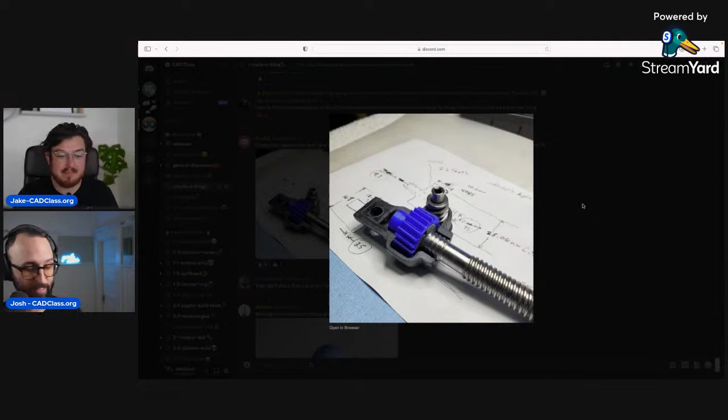Yeah, and I wonder, do you think he probably used the gear plugin? For those of you who don't know, later on in our program we design a gear early on, and then later we do actually use the gear plugin. So the point of the gear project, the involute gear, is both the math and the thinking behind it, and to get better at CAD and at sketching. It's not to make a gear. If you're going to make gears like this, you are going to want to use the gear plugin.

And we'll show you. It's that kind of roundabout way that educators work, where the purpose is not to make a gear, it's to learn about organizing a sketch and thinking a little bit more two-dimensionally for your projects.

Yeah, and eventually as you get better in the workflow, you can also pull things in from McMaster-Carr, which is a catalog of online parts. That's highlighted in a later project. As you progress through the program, you're designing fewer things, and you're starting to think about how you can bring designs together into something functional that serves its purpose. You're not going to be designing every screw, every gear, every motor. You're going to borrow from the library of stuff.

And by the way, I feel like we should mention AI here. I've seen some AI plugins recently. Probably what you'll be able to do in the near future is have typed information that leads you to the catalog, to the CAD model that you can just find. So if you type in M20 bolt, or whatever, I'm making stuff up, it'll just bring in the most common bog-standard bolt, which is all most people need.

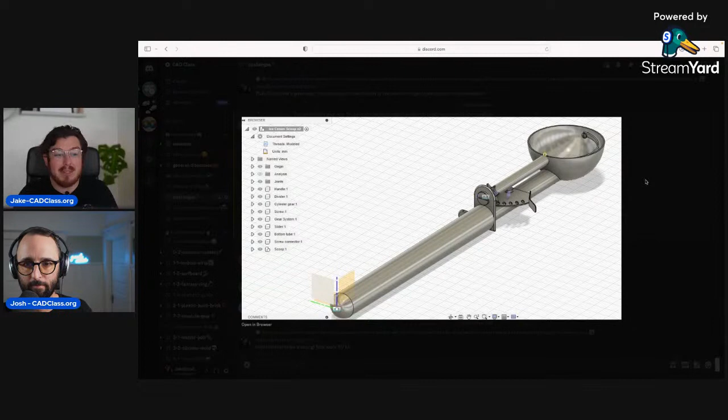I believe this is the first person that's done it, which is awesome. I love this, look at that. It's pretty complex, not easy. It looks like he was working on it for a little while.

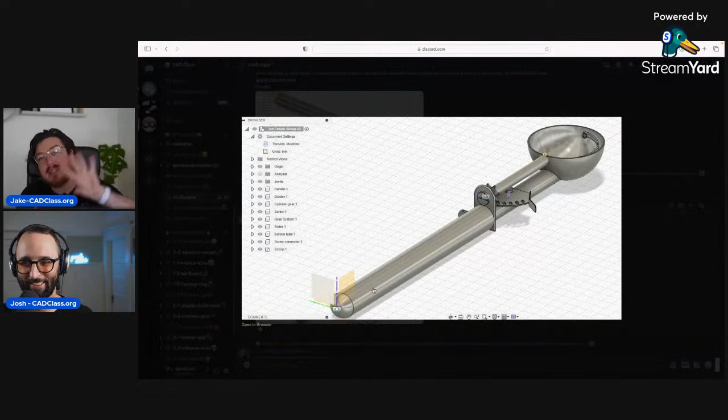I think he started off with the most difficult mechanism, the most difficult bit at the bottom. Good. And then he was like, hey, how do I make the scoopy bit? So we were talking about getting two different spheres to cut out each other, or maybe do some revolve cutting and revolve joining to get a little bit more control with it. But it looks like he did a fantastic job of this.

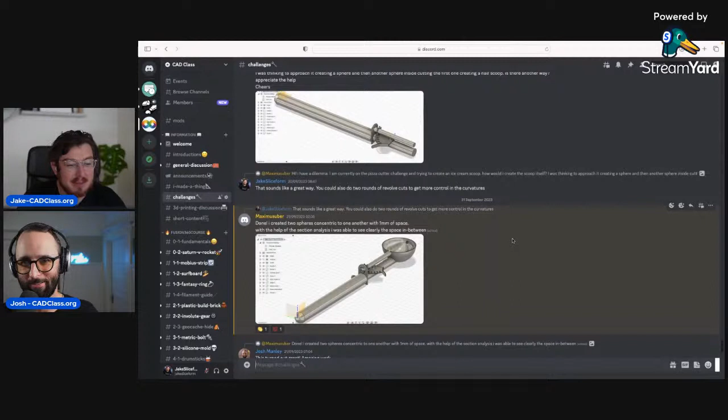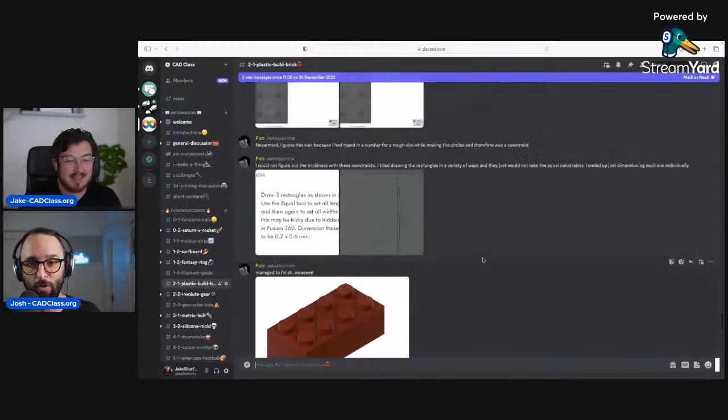Next up is Lego, go to the Lego page and check this out. We had a lot of people make the Lego, right? Shout out to everybody who did it. But then we had somebody actually print it and show us. Scroll up right there, check that.

We did get some comments, so it sounds like a couple people have tried to print these and the tolerances are not perfect. Just FYI, we did not design these necessarily to be 3D printed, so you will definitely have to play with tolerances. We are not pretending like these tolerances are great, especially considering how tight some of these tolerances are for these Legos to stick together but not stick together too hard. This is one of those processes where, I don't know how you feel about this Jake, but 3D printing is really not ideal.

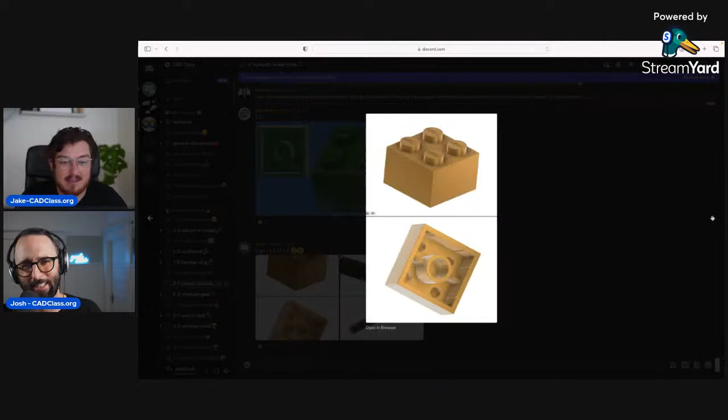It really comes down to there being way too many variables that go into it. Plastic injection molding is such a great technology because it can hold its tolerances so well. You've got two big blocks of metal pushed together, inject some molten plastic, it cools down very quickly, the shells come apart, and it pushes that plastic part away.

And with that, you get a degree of the plastic being so hot, and then as it cooled down, it shrinks a little bit. Because we've been doing this for like 100 years, we can calculate it shrinks exactly 2 to 3%, so we can kind of work backwards. The real consistency that you can get with plastic injection molding is just so high.

The efficiency and the tolerance are so fantastic that it's really the goal for 3D printers to reach up to. The downside with 3D printers is that it can get pretty tight tolerances for your printer, your material, your setup. But if you give the exact same file to someone on the other side of the world who may be printing with the same material on the same printer with the same settings, their environment is different.

So the plastic is going to flow a little bit different. It may be slightly humid, so some of the material puffs out a little bit, or there's moisture inside the filament. There are so many little tiny variables that come into it that it's borderline impossible to have a verifiable, perfect amount of accuracy and tolerance between any 3D printers in the world.

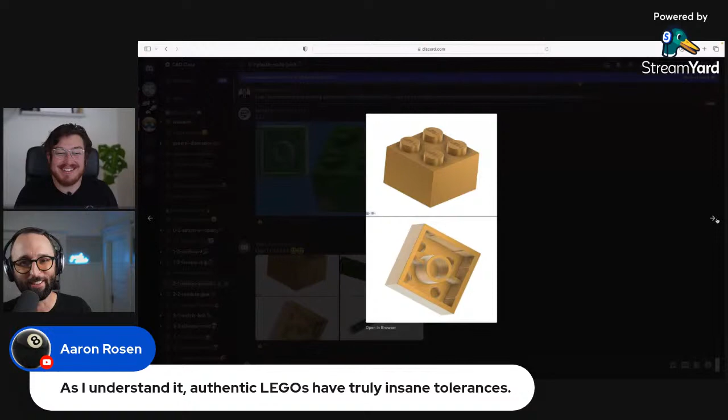A lot of this stuff too deals with, like when you're talking plastic tolerances, when you're talking filaments and things like that, you start to have to become a plastics engineer. You have to think like a plastics engineer to get stuff to work well. So I just love thinking about and talking about Lego - obviously one of my favorite childhood toys too, as I'm sure a lot of people here. Yeah, it is. There are so many little bits and pieces in the design of this that are just so genius.

One of the things I don't think a lot of people know about is when you have plastic injection molding, you've got two parts, two halves of a shell that push together. There is always something called a parting line where the two metal parts meet together. It'll leave this little tiny proud line all the way around the plastic part. I don't know if I have anything right on hand that shows that perfectly. Do I? No, these aren't injection molded. Anyway.

If you look at most plastic parts, you'll see a little line that goes all the way around it, and that's just where it has to go. It's sometimes called a flash line as well. Very, very cleverly, because Lego wants to have really perfectly smooth sides all the way around, it actually puts this parting line on the bottom edge. So if you take a Lego and flip it upside down, you'll see this bottom face isn't actually perfectly flat - there's a little bit of a lip to it.

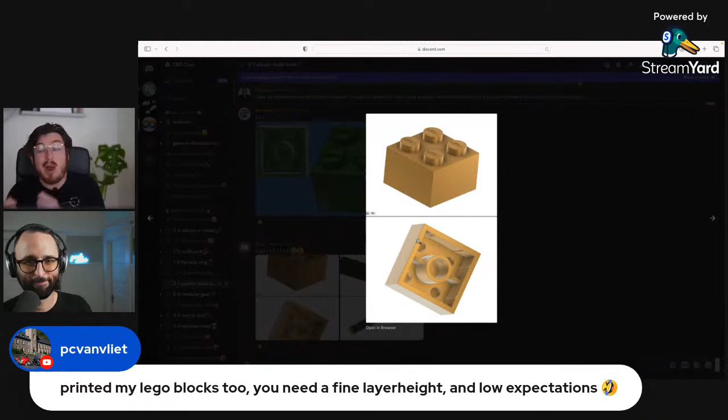So they're finding all these really creative places to hide all of the really necessary plastic injection geometries, but still let it work with the tolerance of the toy, which is just fantastic. Yeah, it's amazing. It's amazing.

All right, I've got a note here about Geocache, and I don't remember what about. So let's go into the Geocache section. And I think there was a question in there, right in there. That's the one, that right there.

So this is someone saying, hey, when we have the sketch for the very top section and this bottom horizontal line right at the bottom, we actually leave that undefined. And they were just saying, why is it undefined? Usually that's when we would project something and add a constraint to make sure everything is groovy.

You absolutely can do that. This was purely just an example to say that you don't need to make sure that every single sketch is fully defined. Most of the time, it's really good practice to make sure that everything is defined and looking good. But sometimes, in some scenarios, it's actually completely unnecessary. It's usually a ton more work to make sure that every single sketch is fully defined, and in this scenario it's just not necessary. You just make sure that a line is below a certain section, and then you move on. So you can fix it if you'd like, but it's not necessary.

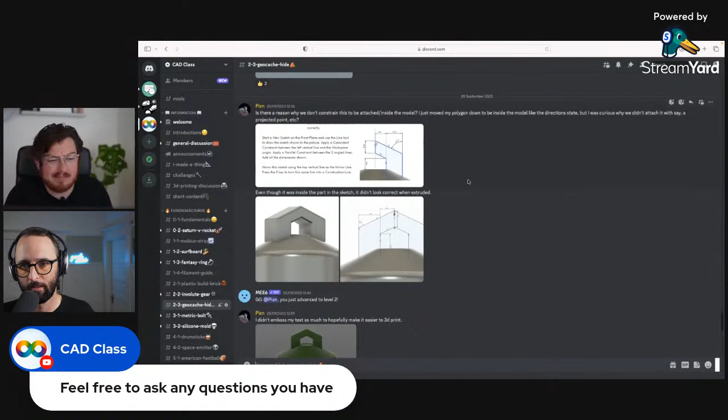I think that's one of those things that as you do more and more of this, and as you practice more, you're going to run into the kinds of problems that you only see when it's not fully defined. Other times you're not going to be able to fully define a sketch, and you're going to have to make a judgment call, and that just comes with practice. So yeah, absolutely. But good question.

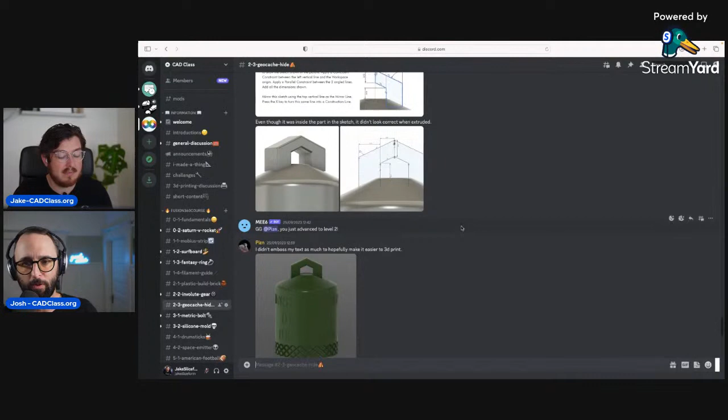I don't think there were any other big ones in there. Geocache, by the way, that's one of those amazing projects where if you print it on your 3D printer it actually screws together. So we forgot to shout this project out.

Oh, the mushroom! Yes, this was fantastic. So in the challenge for this project, it's try and make a screw container that's kind of unique that you could reasonably hide in the world and people not notice. This person made this really, really killer mushroom, which has the container inside.

I love this one, I want to see it. I want to see them prime it and paint it like a mushroom. Yeah, and actually put it out somewhere in nature with a photo. So who was that? Shout out to what was the name on that one?

Johnny 3D. So Johnny 3D, I hope you're here. You're probably not here, but we do actually have a question as well. So look at the chess piece, we never shouted that one out either. No, the Geocache hide chess piece.

This whole page is the cavalcade. Oh yeah, really good projects. The little pill bottle from a long time ago, because he didn't want to just put one pill by itself, and so it just says drugs on it. I freaking love that.

So PC Van Vliet, Mr. Minnick on there does have a question. The mention of the Geocache made me remember my question. Talking isn't for me today. How would we knurl a rounded object? How would we knurl around it? Like knurling a...

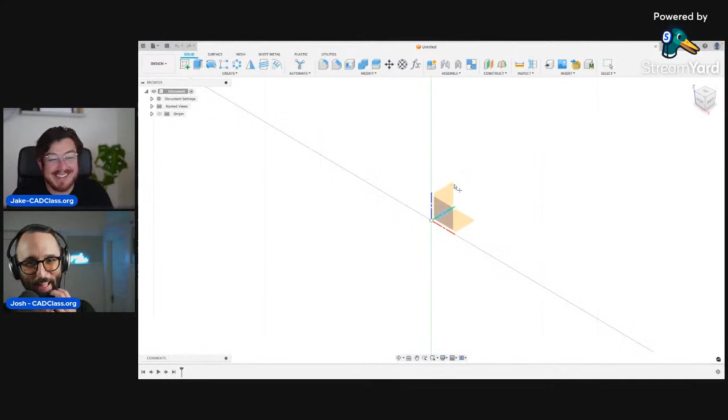All right, let's make a sphere really quick. Let's make this 50 millimeters. Think hand grenade. Okay, well, it's got dark in here. Think not like a soccer ball. Okay, go ahead, so sphere.

Okay, so this is really cool. So the initial thing is, my initial thought is, this is something that would likely be easier and more accurate, not in Fusion, but to take it into something like Blender and then add on a knurled texture to a sphere.

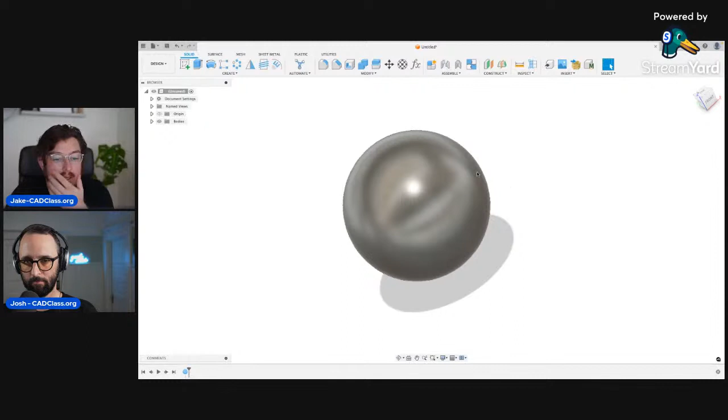I believe there's a way where you can take a picture of a rough surface and tell the software that all the dark pixels are depth, so you can actually get a really even cut into this. As far as a sphere goes, God, that's a good one.

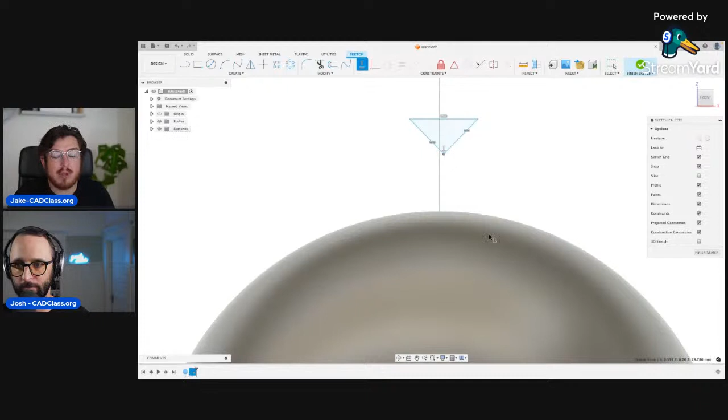Okay, let's try it out, because I imagine this is going to be lots of different revolved cuts in different axes. So let's go ahead and make a little inverted triangle. Let's make it horizontal and equal, and make the bottom point directly above our origin. Let's make it... actually, let's make it 2 mil wide. There we go.

All right, I'm going to be projecting the surface of our sphere. Come on, project. There we go. Is that going to give me a circle? No, that's kind of funky. All right, let's add on a 50 mil circle then.

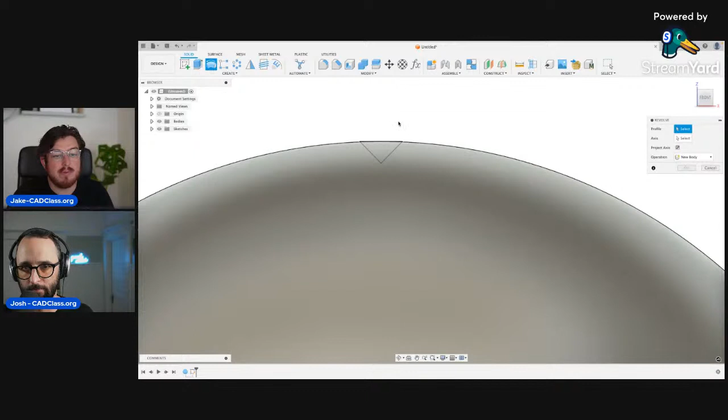I'm actually going to be making this line tangent to this curve, just so I can get it right on the very edge of it. And then I'm going to be doing a revolve cut about this profile, about the red axis.

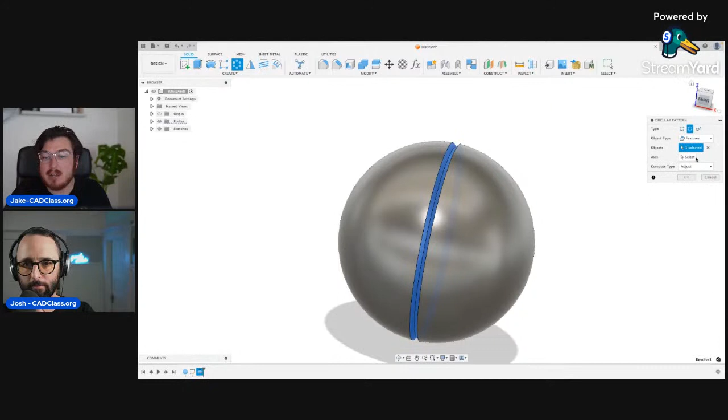So we've got this kind of round groove in there, kind of starting a knurl, and then I'm going to be coming in with a circular pattern and revolving this cut all the way around a different axis. So I'm going to change our object type to features and say that revolved cut is what I'm looking for. And then let's say that axis right there.

This is looking a little bit closer. This looks pretty cool, actually. So I think 13. Yeah, if I do too many it's just going to make the computer... actually no, okay, that looks pretty good. So we've got a really funky, weird metallic orb.

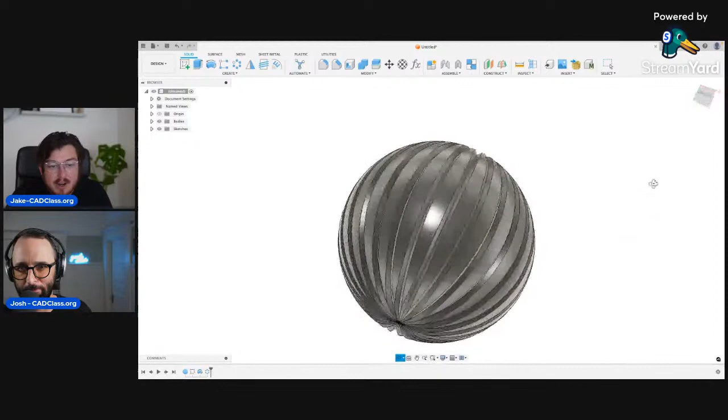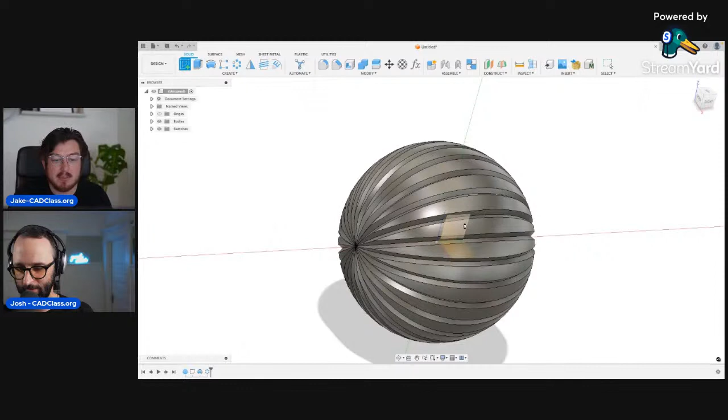And then I'm going to... ooh, how do I do that? I think I want to rotate all of these cuts 90 degrees. I'm not quite sure how I would do that. I think I would just do the same thing in the opposite dimension. This is a really good CAD example where I'm super stumped and just making it up on the fly, which is great. I love this.

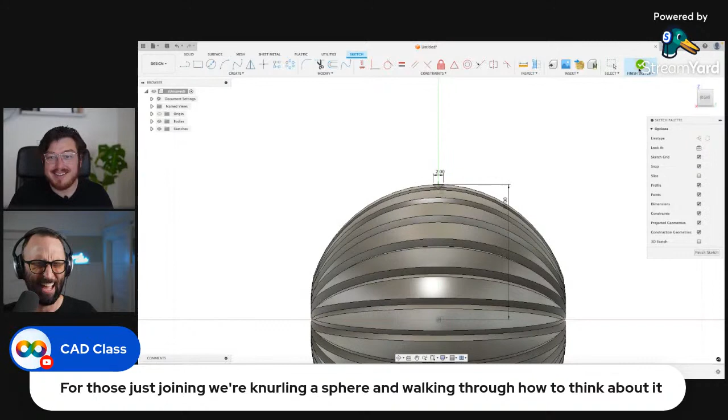This is exactly as you're designing, like the other people on the live stream right now are designing—these are the questions you're thinking. Like, wait, how am I cutting this out of that in 3 dimensions around a sphere so that it lines the pattern up? Not easy stuff.

No, really funky. Okay, aha, we have a little bit of a knurl. All right, let's try and revolve that revolved cut about... ooh, which axis would it be? Oh, this is really strange. I think that one? Yeah.

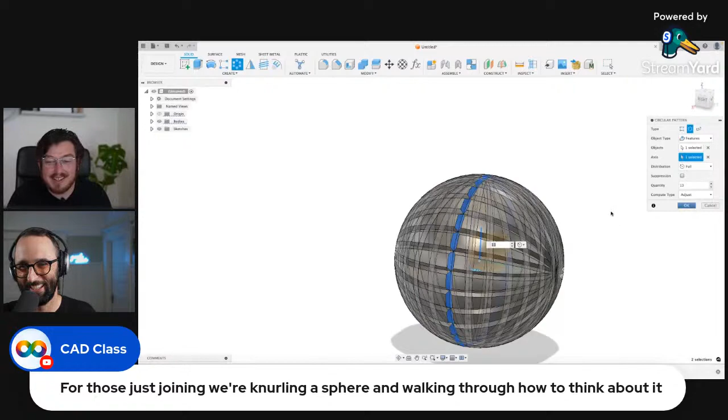Oh, things are getting really weird. Wait, what's it look like? That's actually not too bad. There's some funny... there's that middle, yeah. There's weird poles to it. Yeah, that looks a bit grenadey.

Yeah, that's how I would do it.

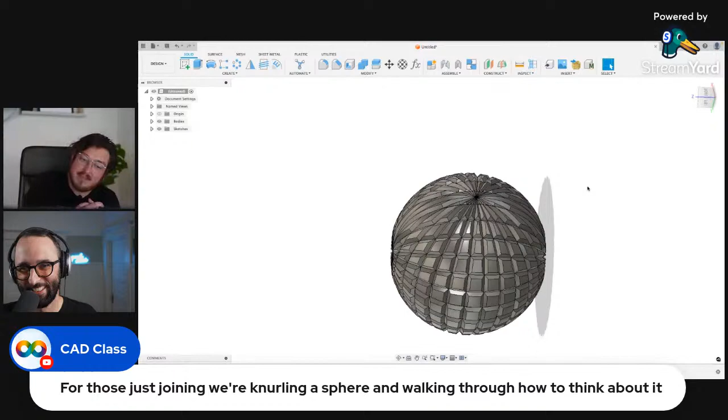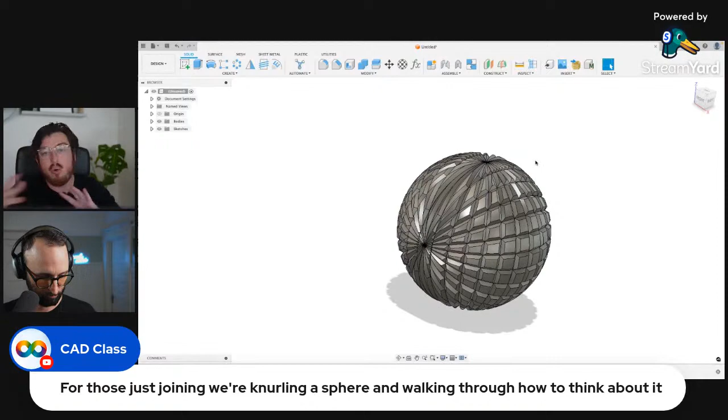There's a really cool video I saw on Reddit years ago about guys making monopolar geared spheres, where you can essentially have a spherical gear cut not too dissimilar to this, but in 3 dimensions. It means you can put motors on either side and spin a sphere in really accurate ways, similar to a shoulder joint, and add on connections so it can move accurately, pick up weights, and spin. It's got all 6 degrees of motion, and it looks not too dissimilar to this, but that's really cool.

I like that, what do you think? I just got stuck on your words—it looks not too dissimilar, and then it scrambled my brain, I had to think about it. So it looks similar, right? Yeah, every time people use a double negative I'm like, wait, so what's being said here? So what was the question?

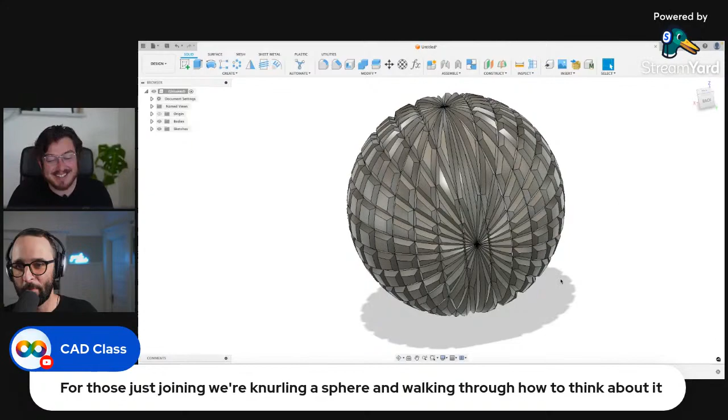What do you think about this? I like the thinking behind it. It's how am I evolving it? I think we're getting closer.

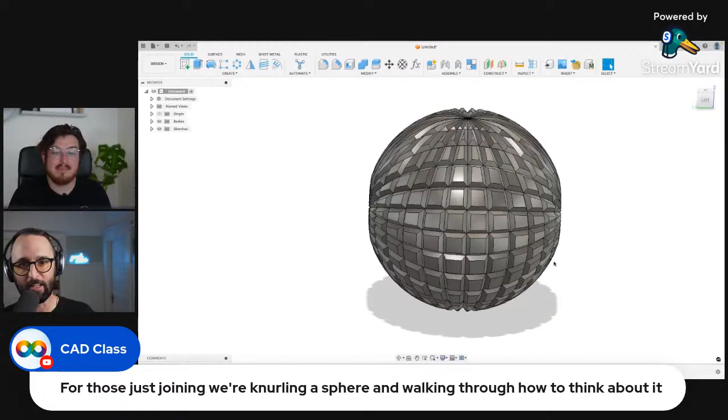This is one of those areas where you're not quite sure the best approach, but let's try it and see the outcome. I think what we're really preaching about when it comes to learning CAD is thinking in 3 dimensions, and thinking about additions and subtractions and combinations in 3 dimensions is not a science, it is an art.

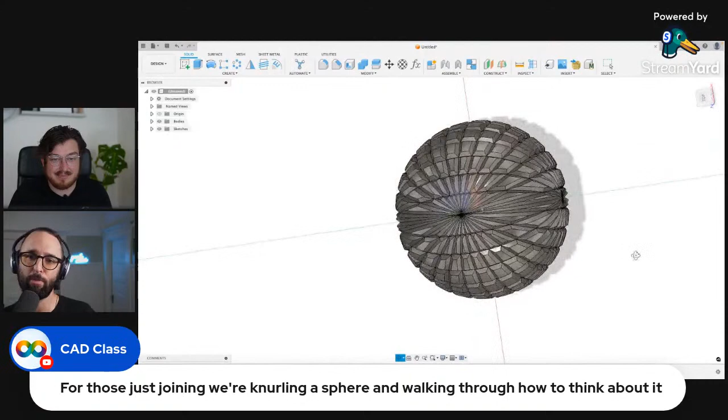It's a language. Of course there's principles behind it, and you can follow some of those and achieve, which is hopefully what we're teaching here. But it's a language you're learning, and like with language where people tell jokes, there's bits of the software and bits of this thinking that seem kind of silly or unintuitive or aren't at all obvious. But because you're in CAD working these ideas out, you can just see what happens. It's a way to experiment really, really quickly.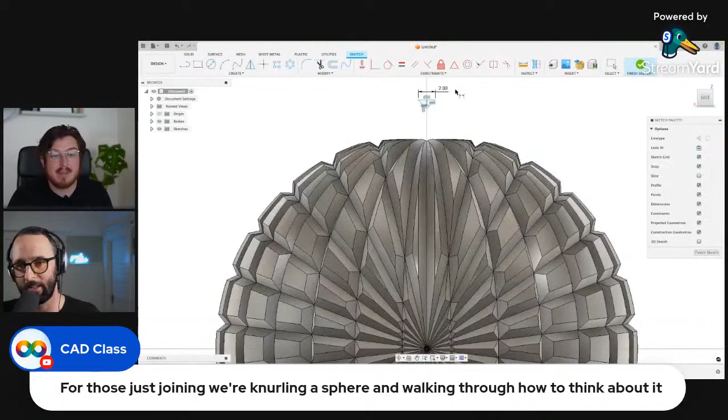So love it. I mean, I can't think of another way. I can think of a lot of ways to do it, but not ones that necessarily come out better. Good. Yeah, it makes me think about geometry quite a bit.

How about the second cuts staying parallel? That's what Edwin says. Welcome, Edwin, by the way. Thanks for the comment. The second cut being parallel.

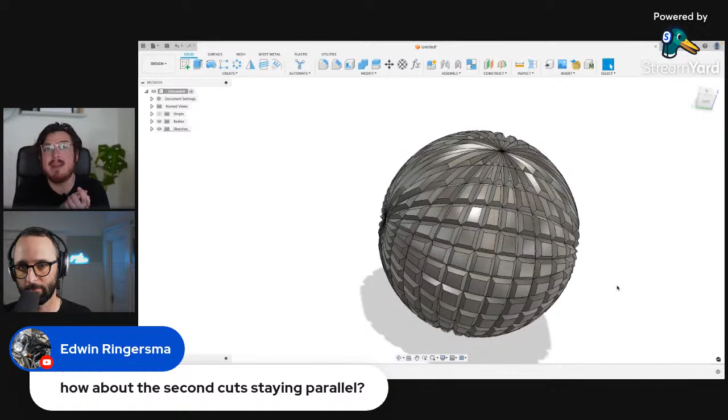Gosh, this has really stumped me. I can't think of any other way to do this. I think the route of going into Blender and making it as a texture map, but then it's 3D-ified. I think that's probably the best way to do it.

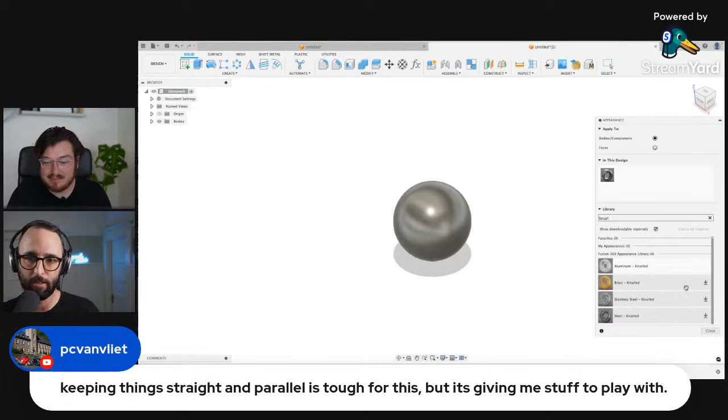So PC Van Vliet says keeping things straight and parallel is tough for this. Yeah, because we're trying to think in 3 dimensions. That's tough. That's what makes organic chemistry so hard, I think, is you're thinking about how molecules collide. You have to think about it in 3 dimensions.

Oh, hey, whoa, that's cool. Wait, so they've got kind of a... Oh, they finally have an appearance for knurl. This is probably brand new. Wow, that's cool. Fusion, you finally listened to us. That's awesome.

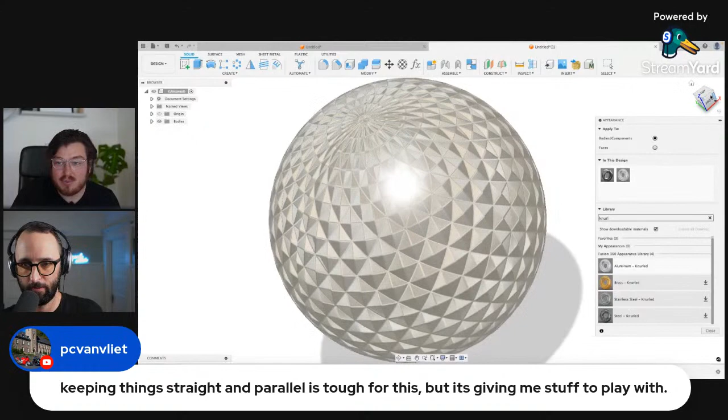Look at that. So then you could absolutely go into the advanced features. Well, you can kind of see how they did it, right? Look at the lines, the lines are following along. What path are those lines following? This looks like an S curve.

If you can see past the reflection, this looks like an S curve all the way down, and then the other way too. So it's like, yeah, it's an S curve. You're right. Huh, oh that's cool. Really, really funky. That's really cool.

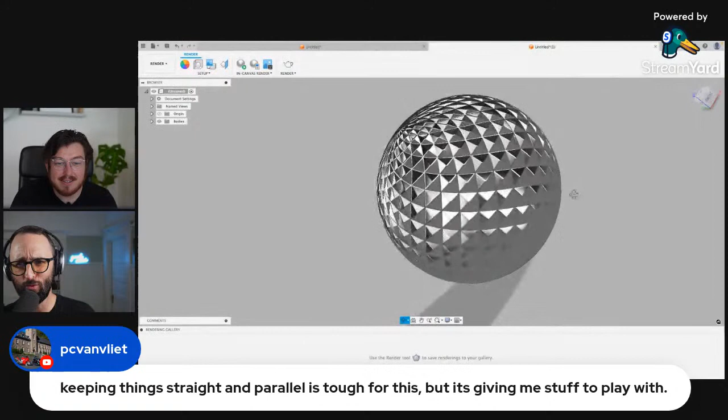Challenge accepted, okay, PC Van. Oh my god, all right, if you guys can actually make this using the design workspace, not just an appearance. Hats off to you, because that's impressive.

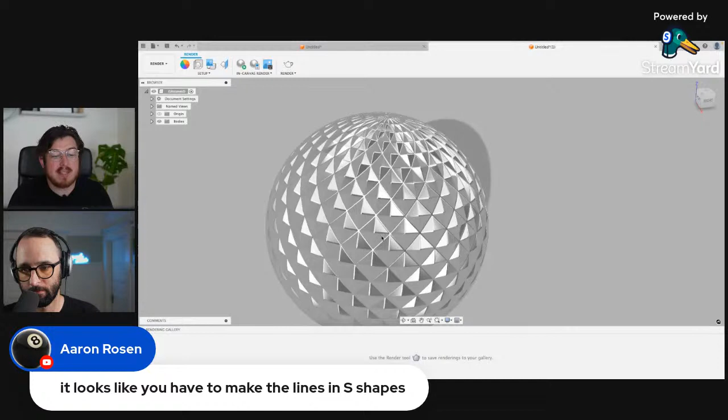It's tough. So it looks like they not only have these lines, which looks like the difficulty is just getting one of these S curves, and then obviously circularly patterning about this kind of upright pole, and then just mirroring that to get the crisscross. So it looks like getting that initial S curve is the tricky bit.

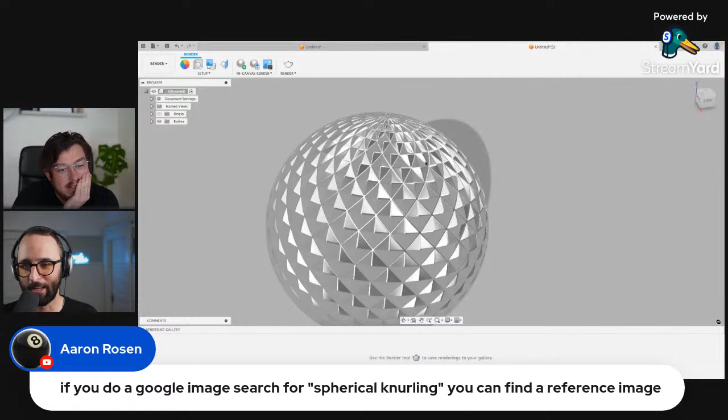And Aaron says, oh sorry, go ahead. Keep going. Oh gosh, this is really... I love it. But one important thing while you're thinking about it: Aaron Rosen here says if you do a Google image search for spherical knurling, you can find a reference image.

Yeah, I like that too. It's like use all the tools at your disposal. If you're trying to figure out how to do something, I think there's no shame, though I think there is value in trying to think things through yourself, so not always relying on the search. I don't want to say 100% one way or the other, but I agree, use the tools at your disposal. How do you knurl around a spherical object? Wow, I don't even know how you'd make this in real life.

You'd need... there is a video on it. You'd need some... Cool.

Okay then. I love that. That's a God, what a really great interesting challenge question. Idea. Mm.

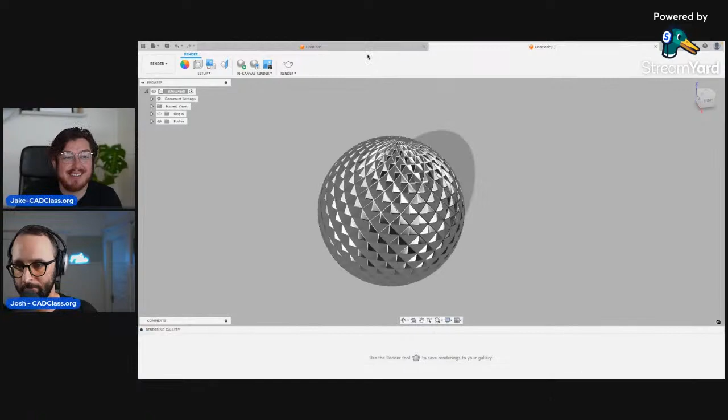God, it makes my sphere look like crap. Hey, you know what though? You did this live on YouTube, so not bad. And it's about the thinking, not necessarily what. Right. You're gonna find these dead ends all the time where your thinking wasn't what you had hoped. It's not so clear when you actually put it on paper.

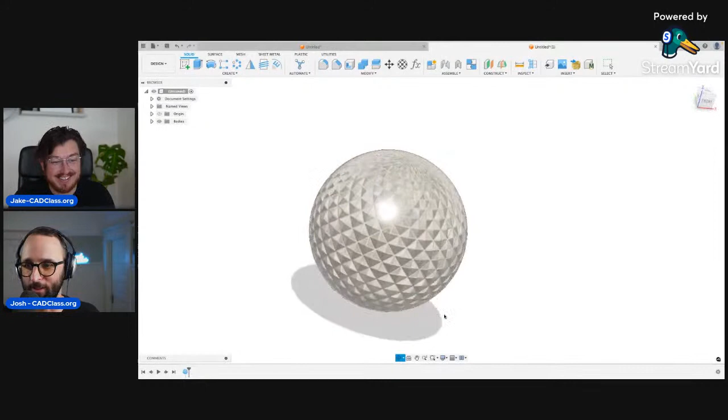Yeah. So, I like how my question is snowballing. Good question. These are the best questions. Yeah, I do love these questions. I'd like to think that I know a lot about this software, or that Josh and I both do know a lot about this. But yeah, these questions that really stump us, I really do love.

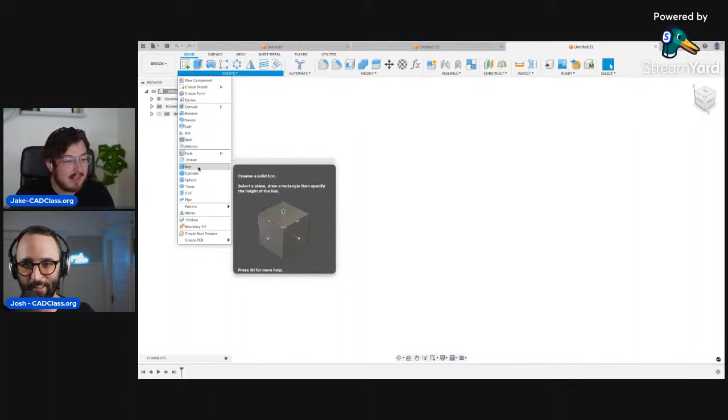I'm gonna give it another go really quick before we take up too much time, because I think I may have figured it out, but I don't want to say my process out loud in case I'm completely wrong. Oh, I think I have an idea too. Well, too bad. I'm doing it first. Do it. I actually think I have an idea in my head, not only seeing that image.

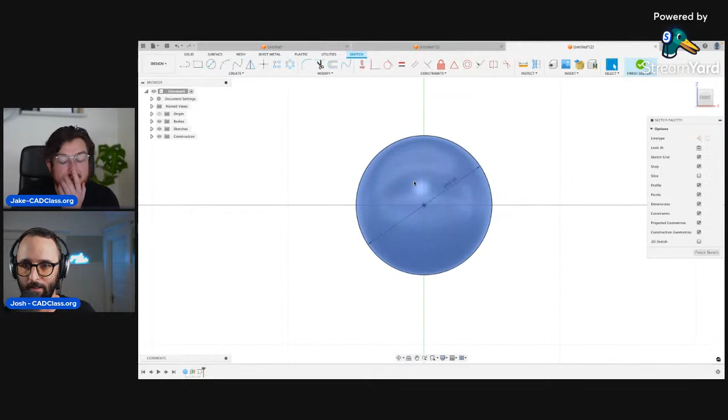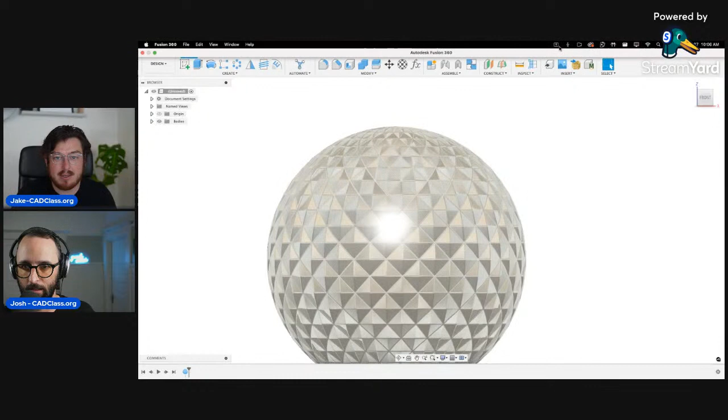It would have to be mirrored about its bottom section. So I'm just trying to make this kind of funky S curve, and it doesn't necessarily need to follow a nice and neat path. But how does it go? So I'm looking at this one. It's kind of coming around and then going tangent up to it. Gosh, that's weird. All right. So it's going to start at the top point there. Yeah, this is exactly. Does that work? I think it does. We'll see.

No, but then it would have to be 45 degrees there. Oh God, this is a fantastic question. I don't know who asked it, but good lord. I think it was Mr. Minnick, PC Van Vliet, I think. Dude, yeah, it was. Fantastic question.

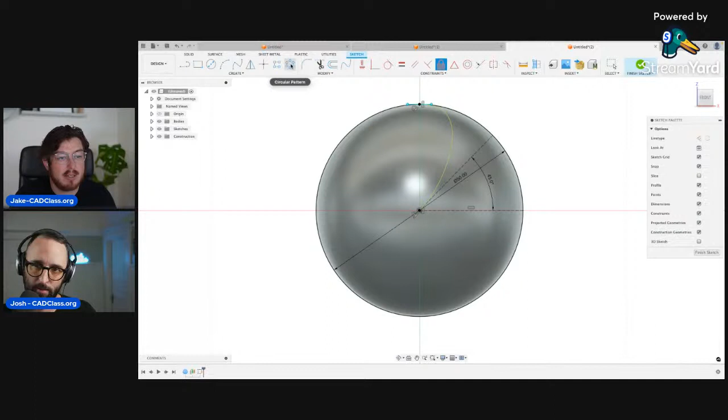Okay, I'm going to try this out with a spline. Let me just add a point up there, here and here. Fit point spline to there. Yeah, that's all I want. Why is it not letting me? That's that. Oh, that's funky. Okay. I want to make this tangent to that curve up there, and then this tangent to the 45. And then I'm going to be messing around with this curve. Yeah, sure. And then let's fix that down. Then I'm going to be circularly patterning this curve about that central axis, but I only need 2 of them.

Because we did 45 degrees, it means that this curve leads into that one really nicely. And we're doing this all on a plane that is offset a little bit from the sphere's surface so that I can project this onto there. So which tool would I do? Not a split face. Oh, goodness. Maybe. Face split that one. Goodness me. Goodness me. I am just figuring this out as I go along. Oh, good grief. Oh, golly.

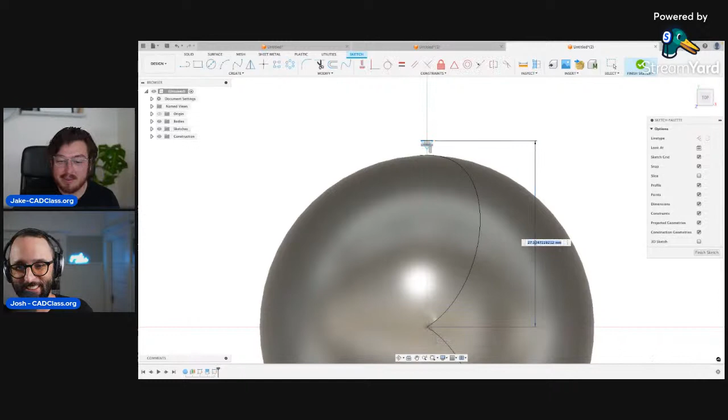Okay. Yeah. What other silly old-timey phrases can we use here? Oh, gee willikers. Oh, gee willikers. We need to bring back some old phrases. Need to bring them back. Yeah, you start, Josh. I think we're starting right now. I think we're starting right this second. God, what a momentous occasion. What's a silly old phrase that you remember? Let us know in the chat.

God, podcasts don't get any more interesting than this one, guys. It's like, I hope everybody's riveted. Ooh, getting some errors on here. Okay.

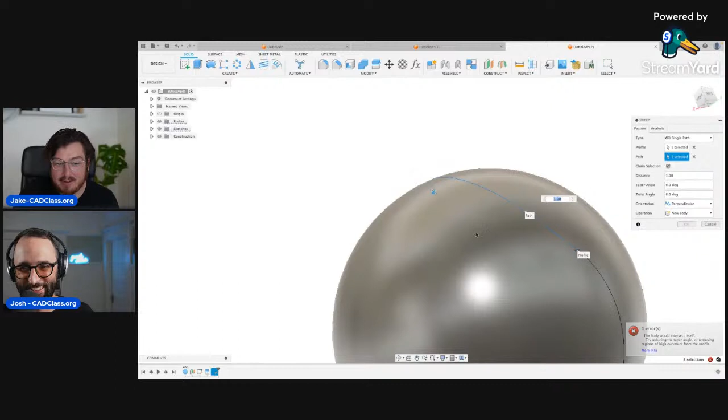Very funky. Oh, aha. Okay. So I want to do it actually. Can I make it go the other direction as well?

Yeah, that one too. It's going to give me an error because it can't go right to the very dead center, which is fine. Oh, it's freaking out. Fusion's crashing. There you go.

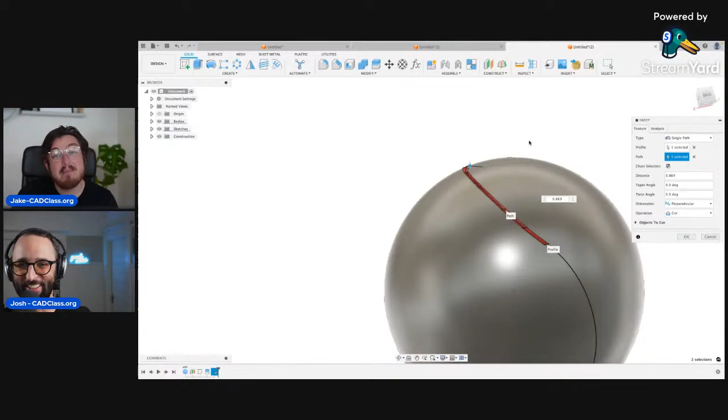Really, I should have mirrored it. No. Oh, it's totally dead. Oh, and I don't know how to force quit this. Okay. Oh, that's hilarious. All right. Nah, that's fine. Okay.

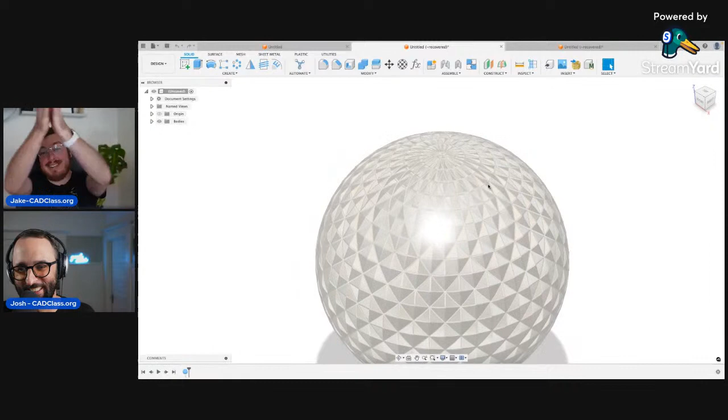Yeah, let's open up. PC Van Vliet says, 'I'm sorry, Jake.' No, this is great. No, we really mean that. We like this. Oh, I don't know if it saved it. Oh, damn. Anyway, that's okay. Yeah, big challenge to you guys if you can do it. Hats off to you. Yeah.

But I think we should move on to another. Well, then we'll just close the company down and you can have it. So whoever can do it, you just get the whole thing. We're gonna retire. All right, come on, Josh.

Give me another question. Okay, so we had something in the silicone mold section. Let's pop in there, and then if this sparked any more questions in the chat, feel free to let us know. Yeah.

So that's going to be in the week 3 parametric design chapter. Yeah, so go into the Discord. Let's see, there's a couple questions. Yeah, let's not break Jake.

That's fine. Okay, so I think there's a question in here. There's a couple questions that popped up in here. Not there, it's down a little further. I don't remember exactly what it was. When I extrude the silicone block, it creates an entirely new component separate from the silicone component I already have. Trying new body does the exact same, creates a new body outside of the silicone component. Am I doing this wrong?

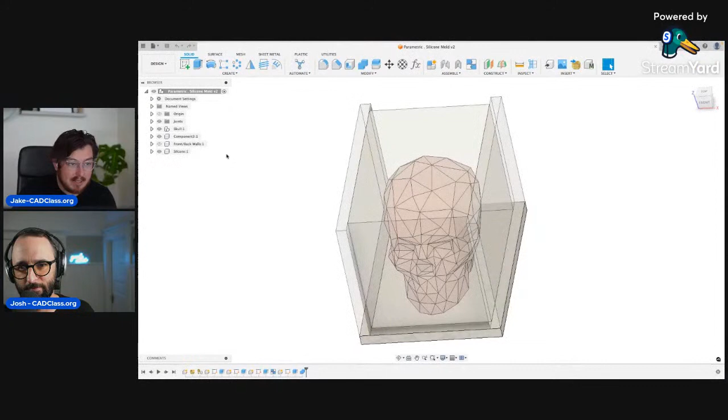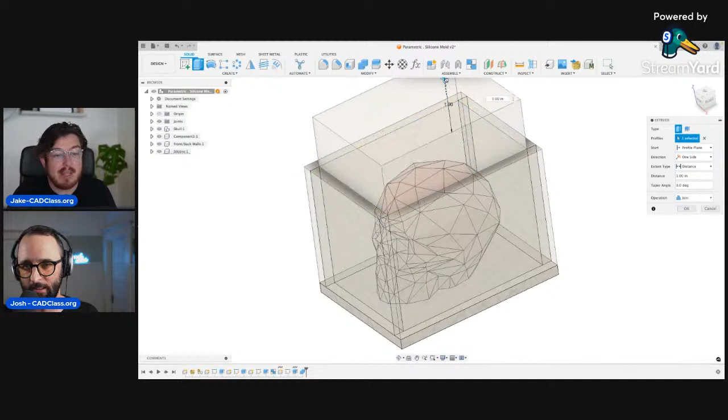So what they're doing, I believe, is they're working on this project with this top component activated up here. And if you're just getting into the very early stage of the book, chapter 3, and you really haven't gone into components and assemblies, activating, deactivating, what all these phrases mean, then this can be really confusing. So it looks like when they're bringing this up, for me it's joining, but for them it's actually saying that it's making a brand new component or a new body. What I believe is going on, and who knows, this is a great example where if you have a question, sharing a picture of your screen is so much more invaluable.

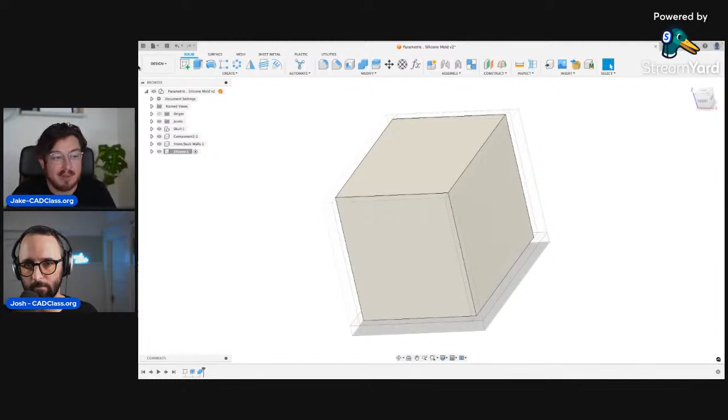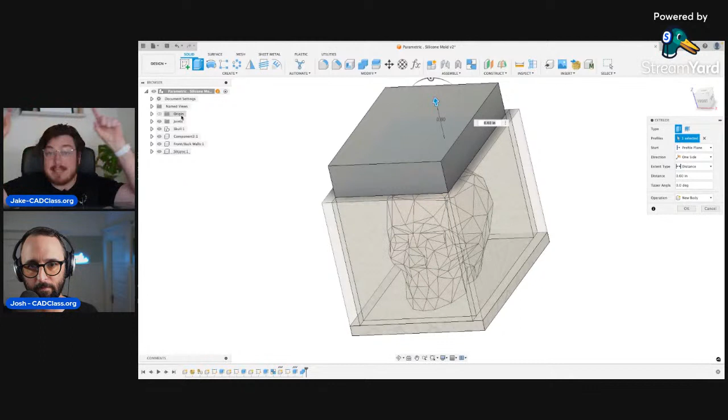Yeah, take a screenshot, show us. Yeah, absolutely. What I believe is going on, in this scenario, I have the entire assembly activated up there. And as they're doing this, it must be accidentally set to new component or new body as well. And when you do this, it's actually changing to a different color. If you say new body, then it's also going to stay the same default gray. And it's going to be added not in any of these components that we already have, but up here, making a brand new body inside the assembly, not inside any of these components down here.

So what you'd actually want to do if you needed to add more silicone for whatever reason, that's when you would select join, and you can see it's actually the same color or the same translucency as the silicone below. You can see that our silicone component in our browser is actually highlighted. So that's great — this is when it would join, add together to the silicone, and it wouldn't become a new component. There's very few instances where you want to make a brand new component from an extrusion. Sometimes new body, but generally, for me, it's just going to be join or cut.

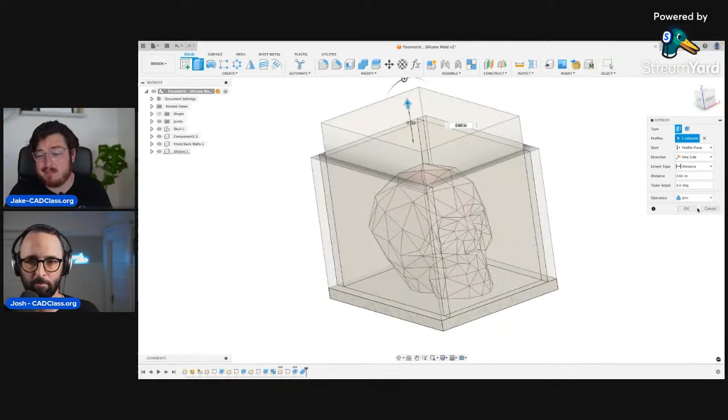Do we have any other questions from this one? I think there might have been one or two more hiding in there somewhere, maybe even a little bit older. Can't remember for sure.

Oh yeah, trying to make a chicken. God, yeah, I love these projects.

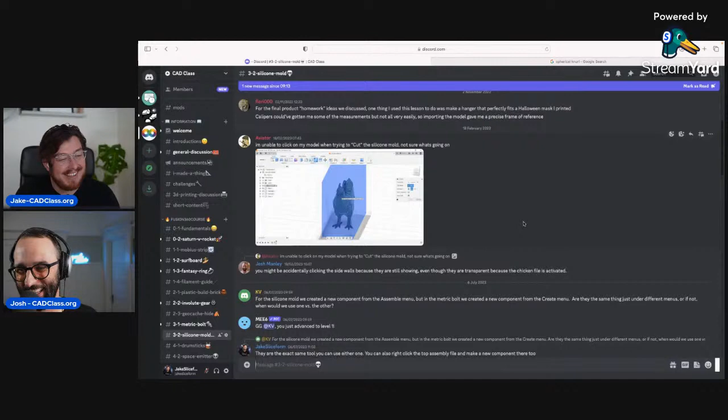With silicone molding too, I was thinking—Jake and I are working on a project with the local children's science museum. They don't like it when you say children, but it is a children's museum, we won't tell them. We also went to the planetarium there, got an amazing show, so much fun. But we're working on the silicone molding—made me think of this.

So when I was doing research last week for the RC balloon cars—they're going to crash into each other and try to pop the other person's balloon. We're building this like a Mario Kart BattleBot sort of game where cars have to crash into each other, one has to pop the balloon of another, and the winner obviously prevails by not having their balloon popped.

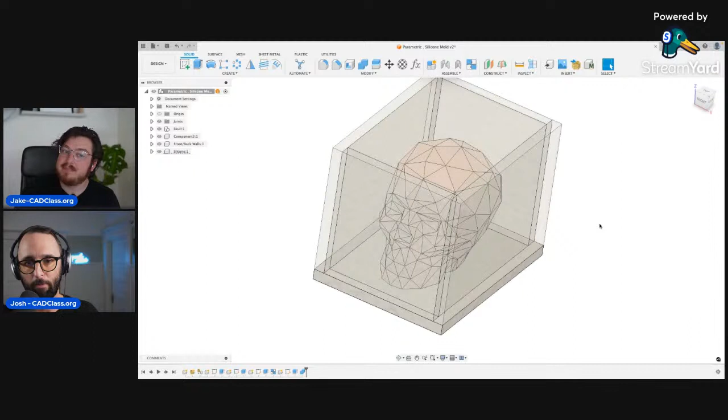So I was thinking through it, is it actually worth doing a silicone mold? Should we make, or have the students make their own rubber wheels, and have that also be part of the project where they don't make the mold—kind of cool, they don't make the mold, but they just pour their mold day one, come in like, alright, we have some silicone molds, we're going to pour in some polyurethane or TPU style stuff and make our own wheels. That could be fun, I thought.

I don't know if we'll do it, but silicone mold—I like this project for multiple reasons. One, it allows you to figure out roughly how much silicone you'd need, but also it's useful in the real world. So sounds fun.

BattleBots, make it FPV. Oh yeah, now we're getting crazy.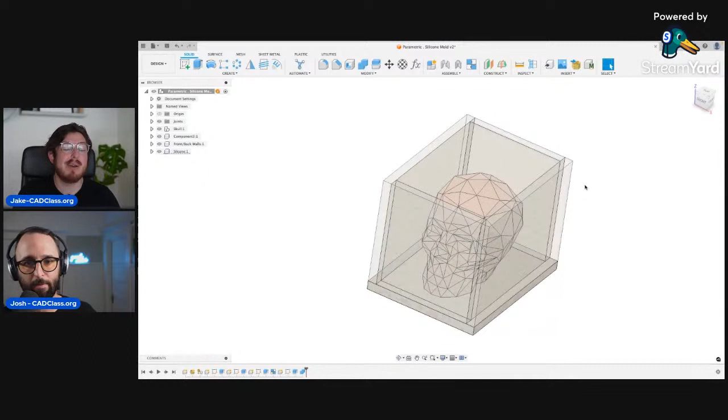The hard part about designing classes—I don't know if anybody here designs classes—is trying to figure out how exactly to fit complexity into an environment that's, I wouldn't call it unknown, but how much complexity can we put in before we start to lose all the basics? BattleBots is a great example: we're building things and want to make a class of it. Do they make the frame? Do they make the wheels? Do we buy those? How deep do you go down the rabbit hole? That, to me, is the art of making classes—where in that rabbit hole do you end, what are you trying to achieve, and what comes out the other side?

So anyways, that was an aside. Silicone molding, I love it. And I was thinking about integrating it into some projects that we're doing in real life.

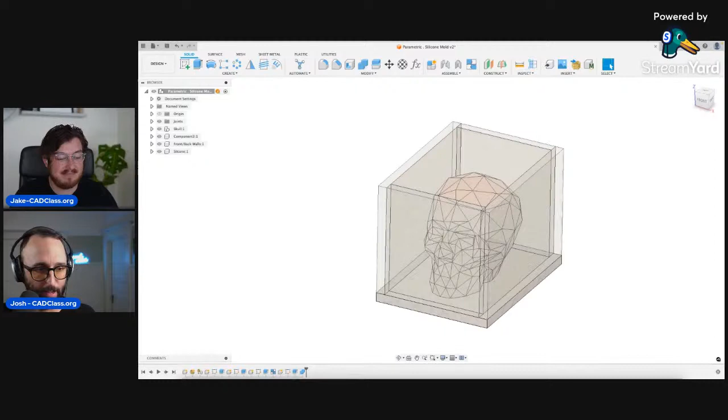They may not know, people love it. Our history with that—Jake and I were at a makerspace in Southern California, and I was running the education department, Jake was teaching tons of classes. Together we have taught, started, built, worked on probably 250 classes—wood, metal, welding, lasers, 3D printers, all kinds of modern manufacturing equipment. We ran probably 500 to 1,000 kids through those programs a year, 2,000 to 3,000 adults, taught teachers all over the state. And man, was that one of the hardest businesses ever in the world to run.

That is insanely challenging. PC Van Vliet, just referencing this—just started a local maker lab as a volunteer. Those volunteer hours are going to go up quickly. So let us know if you have any questions about what it takes to start those, or feel free to hit us in the Discord as well. But tough business.

Ton of fun though, you get to meet a lot of really good people. You also, at some point, get to become the enforcer, which is not as fun, right? It's like, hey, you don't get to do that here. We had this good idea about what it could be.

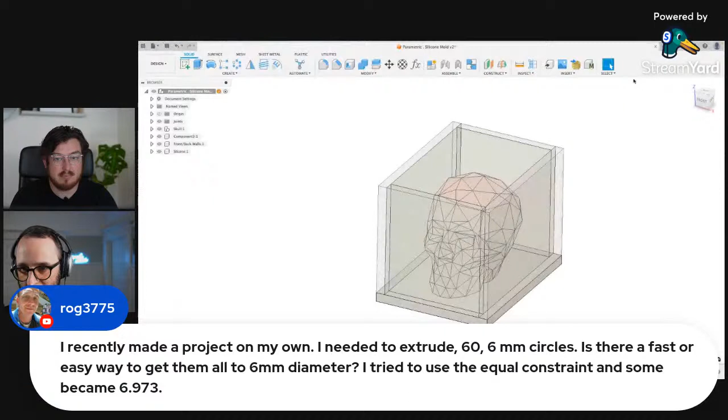Okay, we have a quick question - is there a fast or easy way to get them all to 6mm diameter? I tried to use the equal constraint and some became 6.973.

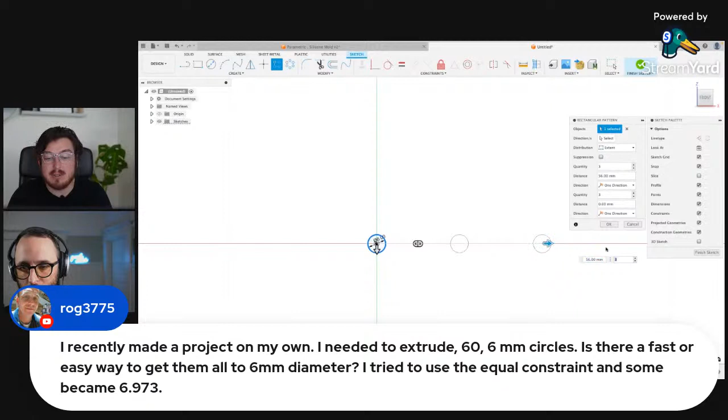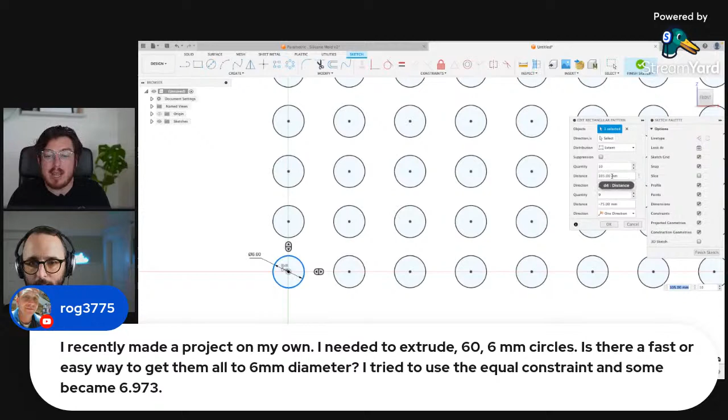Please never make the same thing over and over and over again - that sounds like a nightmare. You are looking for the world of patterning. So if I make a 6mm circle and I need to make a whole grid of them, I would use the rectangular pattern tool. You can say, alright, I want 10 going this way, and then another 10 going that way, and then you can adjust the distance between them. You can also adjust exactly how many you have. Because they are patterned, you only need to ever dimension that first one - all of them are going to be exactly the same. And just like every other thing in CAD, there's always a little icon you can double click, and it brings up a dialog box that tells you exactly what you can change. If you say, oh, I want the distance to be 200mm, that's going to double the width of it. So you can go through and edit lots and lots of goodies.

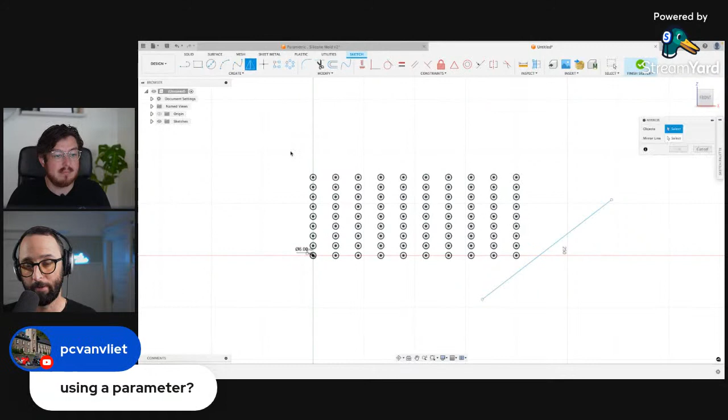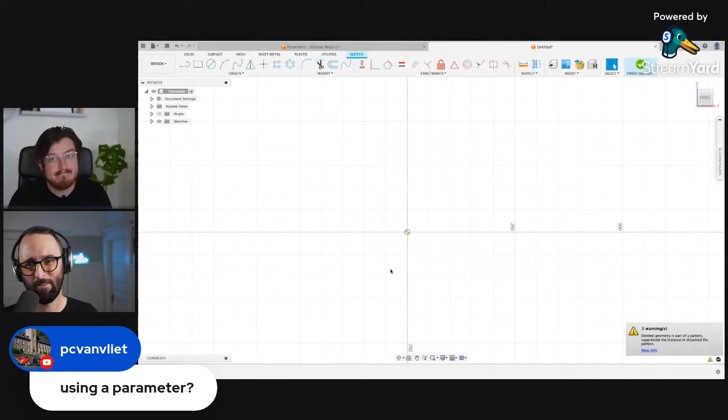So the pattern tool - we also have mirror functionality, which you wouldn't use in this case, but there are a lot of different ways to achieve the same thing using a parameter. You could also use a parameter, but if you know for certain that all of these circles are going to be the same diameter, you're better off using the pattern tool, because with a parameter, you still have to draw them. You'd have to draw a circle and then copy and paste 60 more - that's just a clunky workflow. Patterns are your friend. We've got, oh excuse me, only 2 types: circular pattern and rectangular pattern. So yeah, those will be your best friend.

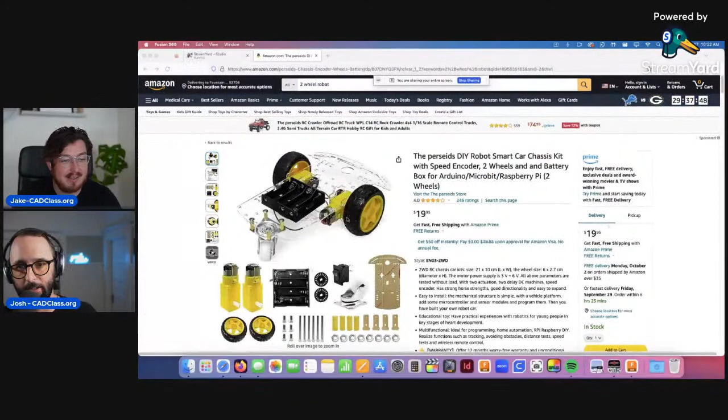We'll just work on our stuff - so we're building a robot. Jump back and forth - look, this is the frame I was thinking about right here, just really simple. We're just diving in here, getting down to some basics - how we want to design a car frame, looking for some inspiration on Amazon, some products that already exist. So this is kind of what I was thinking, Jake, to simplify it a little bit and keep the project costs down - we take some inspiration from a design like this.

We laser cut the frame. I like the fact that they put that wheel on the front that doesn't actually move. It simplifies some of the project costs. Yeah, I think that's a good design decision. And then you have this base template where you can mount the batteries and the rest of the components. So what do you think about something like that as a starting point?

We don't necessarily have to use this, and probably the gear ratios would be a little off. But yeah, I am not 100% sure how. Is this remote controlled? No, it's an on-off switch, I believe. Does it say it's for Arduino? I think we would just hook it up to an on-off switch.

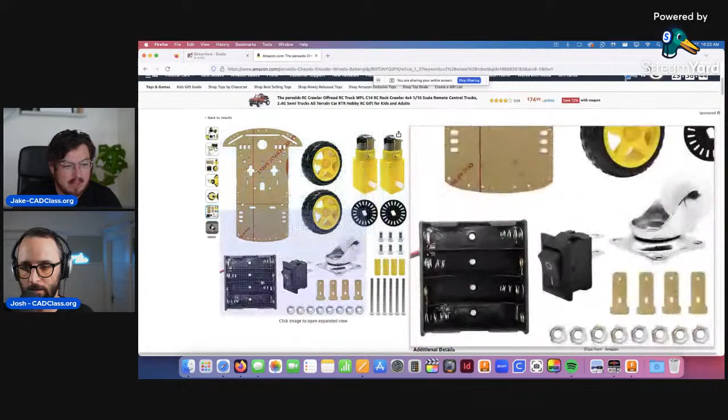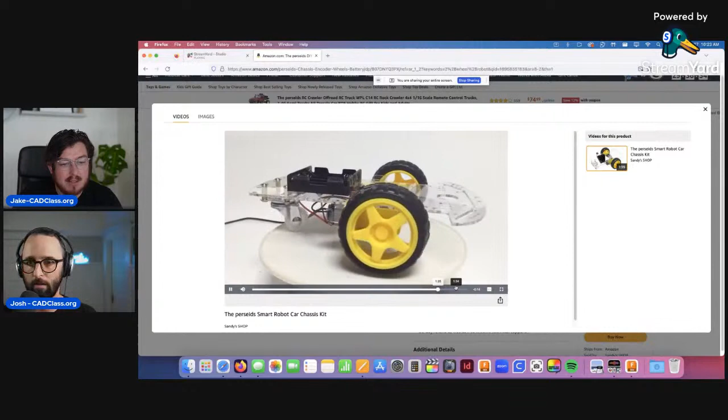Smart car chassis with speed encoder. I am not seeing an encoder. Yep. I think we can plug a little Arduino into it and get some extra work out of it. That's cool. I think it might be a little underpowered. The gear ratio might be a little bit off.

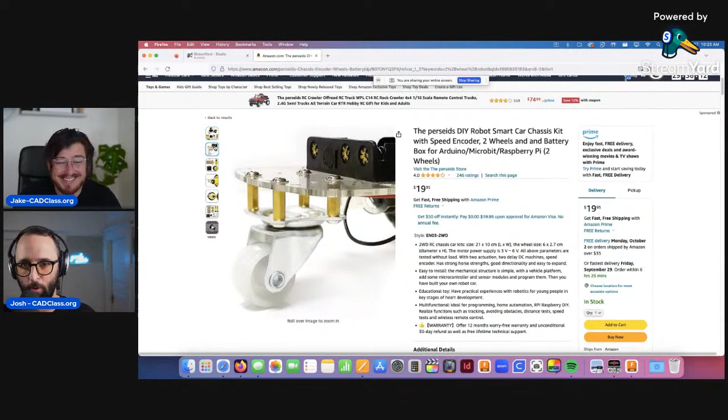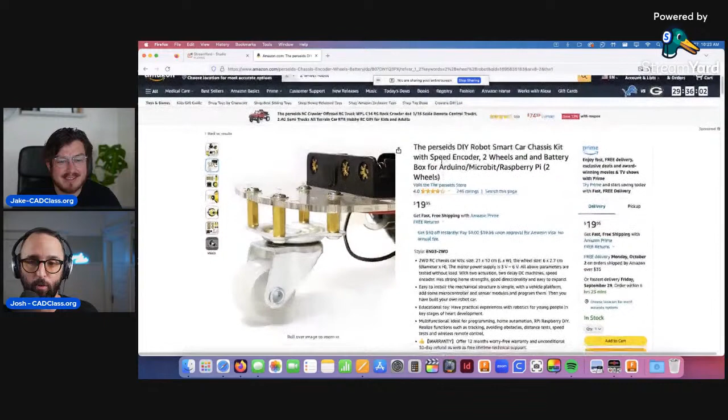Very underpowered. Yeah, if we're gonna have robots that are running into each other, you don't want them to crawl into each other. That might be kind of boring. But you also don't want them to smash into each other so hard that it breaks. Right, I think a little bit of smashing is fine, but not so much that it breaks the whole robot, and everybody's like, oh, here's my pile of junk at home.